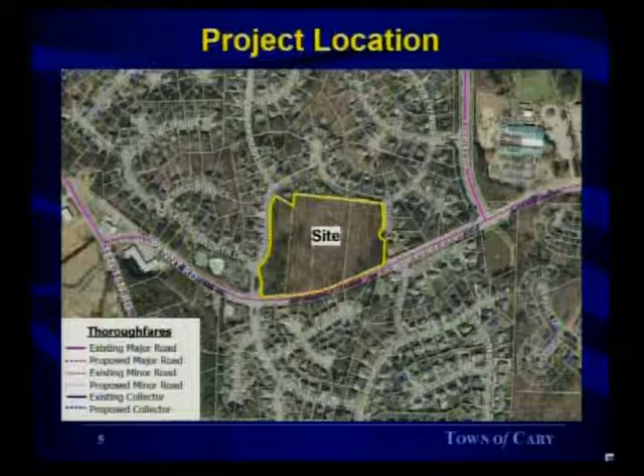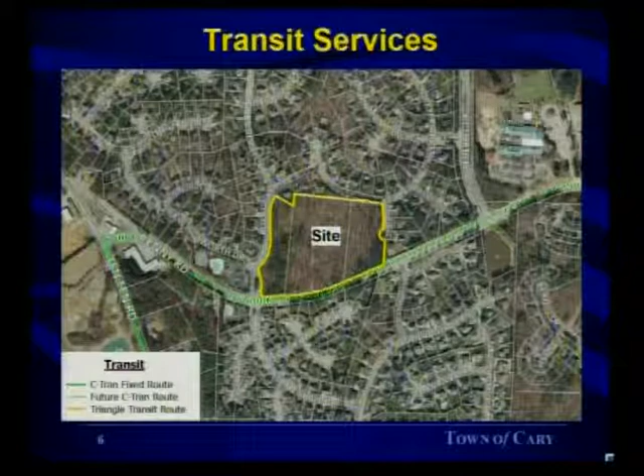The site is located along a future C-Tran route. There are currently no plans in the town's capital improvement budget to extend the route along this corridor in the near future.

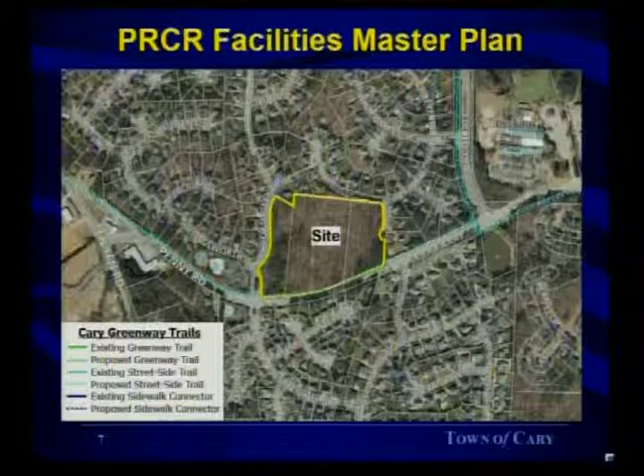The Parks, Recreation, and Cultural Resources Facilities Master Plan does indicate a 10-foot street side trail, formerly known as a multi-use trail, running along the northern side of Penny Road. This would extend westward toward the municipality boundary with Apex, and east toward another planned street side trail running along Ederlee Drive into the Regency recreational areas.

The site is impacted by a single stream buffer that runs north-south through the site, separating off approximately a third of the subject property to the east versus two-thirds to the west. This is drawn from our GIS maps, so it does over-exaggerate the length of that stream buffer. Field determinations, shown on the site plan, show that buffer being slightly shorter than it is here.

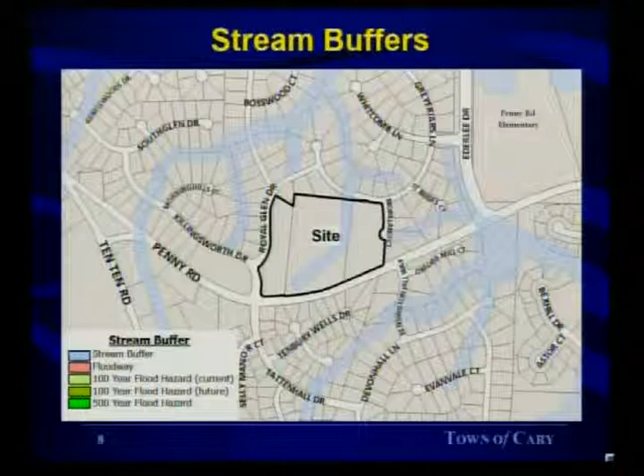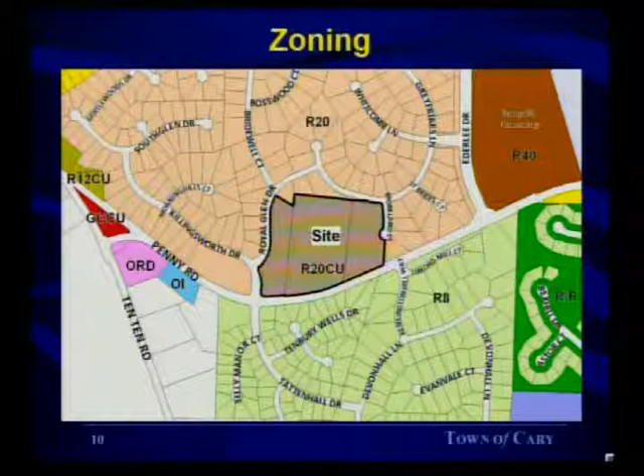The property was rezoned to Residential 20 Conditional Use late last year. The conditions on that conditional use zoning were related to density, restricting the number of lots in the subdivision to no more than 20, and dealing with dimensional standards, restricting the minimum lot width at 100 feet and the minimum roadway setback to 35 feet.

The subject property is currently developed with a single residential dwelling that's proposed to remain in place during development. They're carving out a new lot around the existing house. The remainder of the property is wooded with predominantly a hardwood canopy, with some small pines along the edges where it's been disturbed.

As mentioned earlier, the applicant is proposing development of a residential subdivision consisting of 20 lots, which is what was set by the conditional use rezoning. Almost half of those lots, 9 to be precise, would be accessed via existing roads in the surrounding subdivisions—Royal Glen Drive along the western edge, Greyfriars Lane to the north, and Moreland Court to the east. The remaining 11 lots would be accessed via a new cul-de-sac being proposed by the applicant.

Stormwater treatment for the site is being accommodated through the use of 2 bioretention areas: one at the northern end of the site, the dark blue area at the end of the cul-de-sac, and the other at the southern end of the stream buffer, adjacent to the streetscape.

The applicant is providing the 50-foot Type A streetscape required along a thoroughfare for residential development along Penny Road. Because this development consists of residential detached dwellings on lots over 8,000 square feet, just as the surrounding development, there are no actual perimeter buffers required. However, at the time of development, there is a 20-foot Type B landscape area that will be planted and required to meet the Type B standard at CO, but there's no long-term protection there.

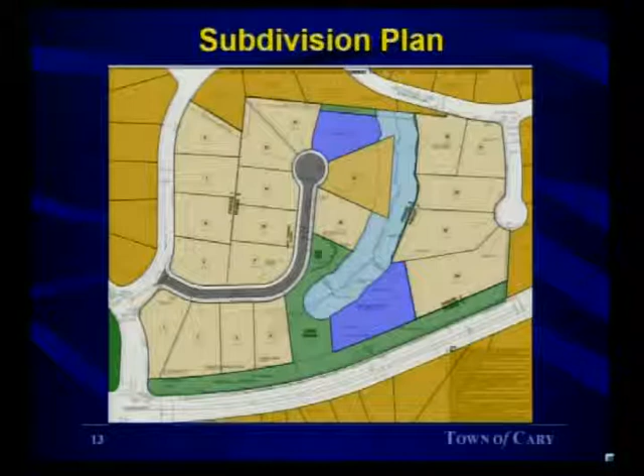The applicant's subdivision plan does include several minor modifications to development standards of the town. The first is a modification to the connectivity index. Items 2, 3, and 4 relate to improvements along the Penny Road frontage, and the 5th item is removal and replacement of 2 champion trees on the site.

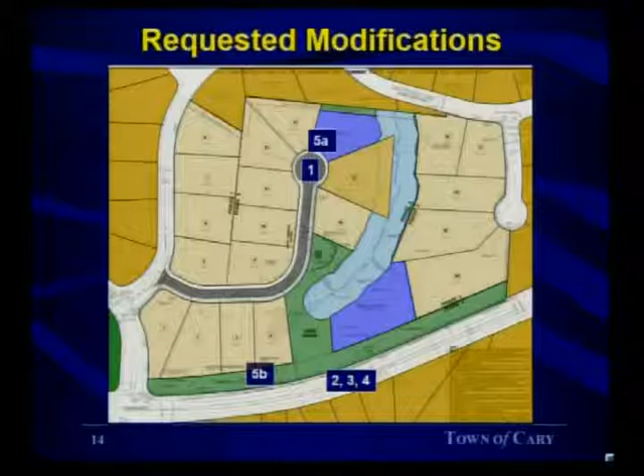The connectivity index established by the Land Development Ordinance is a ratio between street segments and street nodes or intersections. The LDO requires that ratio to be 1.2 or higher. The proposed subdivision consists of a single street segment, being the length of the cul-de-sac, and 2 nodes—the intersection with Royal Glen Drive and the cul-de-sac bulb itself—resulting in a connectivity index of 0.5, which is obviously below the 1.2 required by the ordinance.

The LDO also requires that for subdivisions where the connectivity index has been modified, the applicant must provide additional pedestrian connections linking cul-de-sacs—a 6-foot paved trail, as it states. The LDO further specifies that this pedestrian route does not need to meet accessibility requirements.

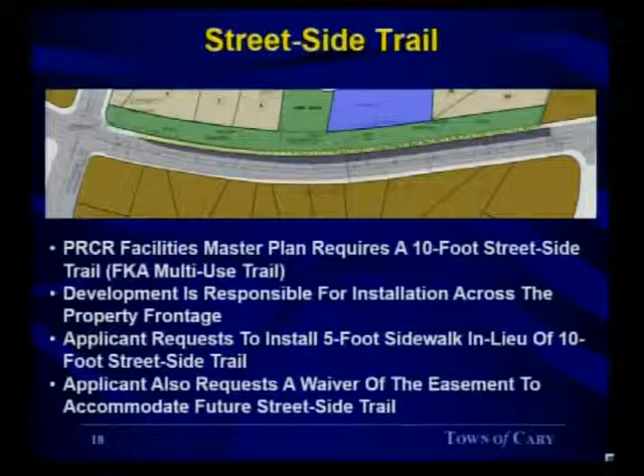The fifth and final modification being requested by the applicant is removal and replacement of 2 champion trees on the site. The applicant did a tree survey as part of their submittal and identified 10 trees in excess of 32 inches, which is the new definition of champion tree recently adopted by Town Council. Of those 10 trees, the applicant is proposing to remove 2, identified as tree 2, located at the northern end of the cul-de-sac, and tree 9, located adjacent to the right-of-way along Penny Road.

That concludes staff's presentation or introduction to the project. We will have additional analysis available for council to consider following the applicant's testimony and the speaker's testimony.

Thank you. This time I'll call on the applicant's attorney to present arguments and evidence in support of the application by addressing the applicable approval criteria.

Thank you, Kevin. Good evening, Mr. Mayor, members of the council. Jason Barron with Morningstar Law Group here on behalf of the applicant. Here with me tonight is Mr. Kurt Berger with K. Hovnanian Homes, Robbie Bell, an engineer with Bass, Nixon & Kennedy, who will be providing testimony related to the plans you all have seen, and finally Jeff Hochanadel, a transportation engineer with SEPI Engineering, who will be providing information with respect to traffic impacts anticipated to be generated by this development.

I'm excited to present this case to you all, quite frankly. Oftentimes I'm in front of you all with cases that are challenging, where we're trying to fit a piece into a puzzle that might not make sense for everybody involved, and I think this is a case that makes sense. These are minimum 20,000 square foot lots. Some of those lots shown on the plan, as you go to the bottom right-hand portion—let's see if I can get him to wake up—some of these lots are in excess of 40,000 square feet. This is a plan that makes a lot of sense. It is being developed consistent with the adjacent areas. It is providing sidewalk connections to the existing infrastructure. And while, as Kevin pointed out, it's not a part of the previously approved development, it's essentially fitting in that fashion. I've got Kevin—I don't know how quickly we can get to the exhibit that's not the clearest exhibit in the world.

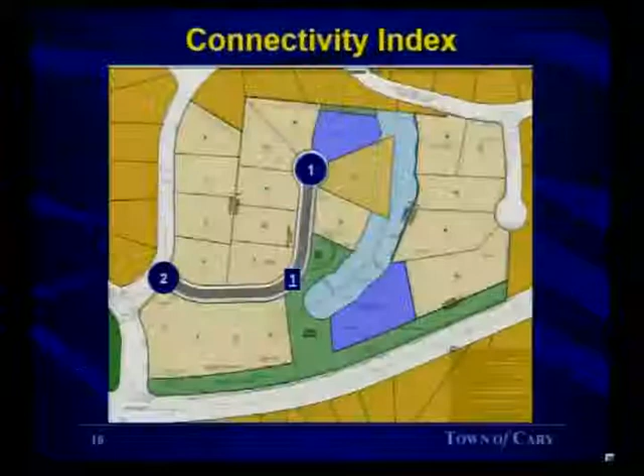What we are proposing is a road width entirely consistent with what's already on the ground, and a sidewalk connection entirely consistent with what's on the ground. It will feel incredibly seamless when you look down—it won't appear that a modification was made to development standards that otherwise should have applied. When you drive past the site, it will be just like everything around it. So the primary justification for those modifications is that we're trying to be consistent with the environment we're developing in.

So with that, I think the testimony you'll hear tonight from our experts is that the minor modifications are justified, and that the evidence supports a finding that we meet the requirements for approval of a sketch plan. At this time, I will call my first witness, Mr. Kurt Berger, on behalf of K. Hovnanian Homes.

Good evening, Mr. Mayor, ladies and gentlemen of the council. My name is Kurt Berger. I'm the division president for K. Hovnanian Homes of North Carolina, the applicant. I've spent 29 years in the home building industry, the last 10 of which have been in the division president capacity here in the Raleigh, Cary, Chapel Hill, Durham area. During those 29 years, I've overseen the development of more than 200 subdivisions, yielding approximately 20,000 lots. I'm excited to be here tonight as well.

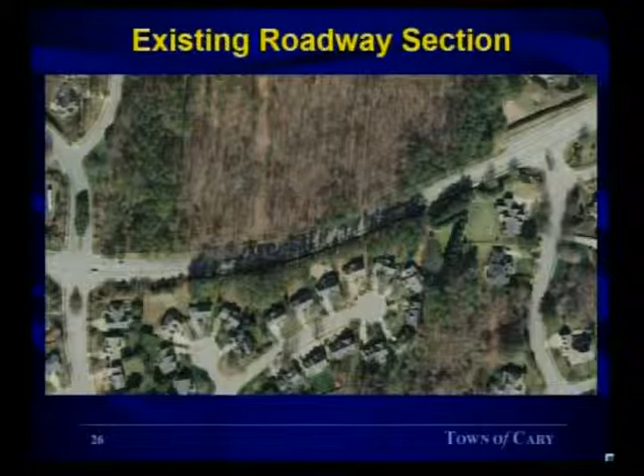I want to give you a couple perspectives of some photos. This was looking west from the main entrance into the subdivision from Killingsworth Drive. It's basically a 60-foot back-to-back street section with curb and gutter on both sides. It does have curb and gutter and sidewalk, and it's basically marked for 4 travel lanes.

Looking from the property toward Ederlee Drive, the developments already built out previously in this area, again it's matching up to a 60-foot back-to-back street section with curb and gutter and sidewalk. Given the gap in the roadway, there's generally just stripe for 3 travel lanes, as it's currently right now.

I want to talk briefly about the right-of-way dedication. Our CTP requires a dedication of 100 feet that would facilitate a 4-lane median divided roadway with curb and gutter, sidewalk, landscape median, and wide outside travel lanes for bikes. The applicant proposes a non-standard right-of-way width of 79 feet, of which they would use easements to basically facilitate the construction and installation of any easements or other utilities that may be needed in the shoulder of the roadway.

Staff has several observations I'd like to point out. First, the substandard right-of-way width offered by the applicant is insufficient to support infrastructure like sidewalk, drainage, public utilities, and other private utilities that we generally put in our shoulder sections of roadway. The proposed width is also insufficient to support future development of the road to the ultimate CTP without the town or NCDOT having to purchase that additional area if we decide to do a future widening project in that area. The easements offered by the applicant may not provide the level of authority guaranteeing the town or NCDOT to dictate other private users and uses allowed in those easement areas.

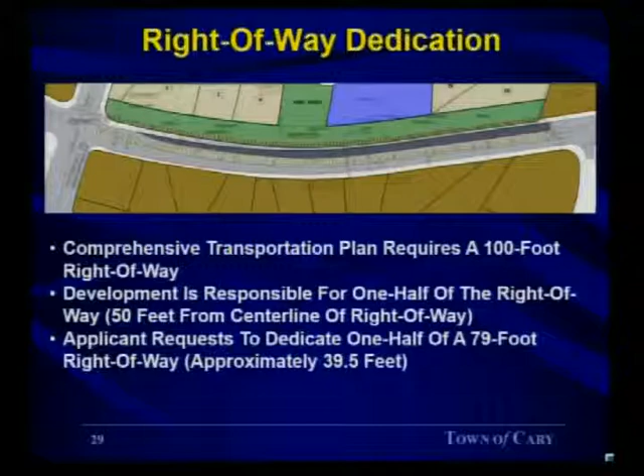I want to talk a little bit about the road widening improvements themselves. Our CTP requires a 4-lane median divided roadway, of which they would provide half along their roadway frontage, including curb and gutter, sidewalk, and median provision in the roadway. The ultimate width is a 78-foot back-to-back street section with an 18-foot landscape median, of which they would be required to do half.

The applicant proposes to match the roadway previously completed by earlier developments about 20 years ago, which is basically a 60-foot back-to-back street section with curb, gutter, and sidewalk already existing. The applicant also proposes not to construct the landscape median at this time, per our CTP.

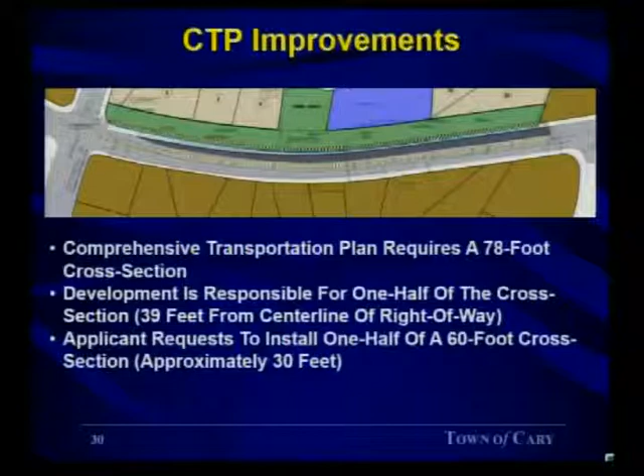Staff has a couple observations about this plan. The widening proposed by the applicant is not consistent with our CTP. Secondly, the landscape median does have aesthetic value per our town policies and guidelines, but limited value in managing access along this corridor since there are no existing driveways or intersections that would provide access management. So it provides no real traffic management benefit.

Staff has some opinions or things you may want to consider tonight going forward. You do have several options. I'll outline 4 options for you, which you may wish to consider regarding the road widening.

The first is to accept the widening proposal by the applicant to build a 60-foot back-to-back street section along their frontage. Second, accept the widening proposal but require a payment in lieu for the unbuilt section of what CTP would have required. Third, require the applicant to build to CTP with the landscape median. And fourth, require the applicant to build to the CTP width without a landscape median, and perhaps accept a payment in lieu for the median section of the roadway.

That's all I have to offer tonight.

I'm going to turn it over to Sandy Bailey from our Facilities Planning Group, who's going to talk a little bit about our street side trail.

Good evening, Mayor and council members. The street side trails are part of the town's overall greenway network. They're typically 10-foot wide paved trails that run along roads and connect other off-road greenways. They're used by pedestrians and cyclists, as are your typical greenways.

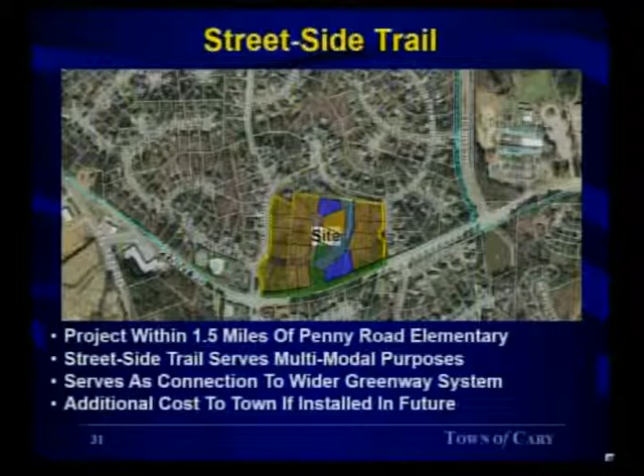And finally, just to close the loop with the request to remove 2 champion trees from the site. Of the 10 champion trees identified in excess of 32 inches across the site, they're proposing to remove 2. The applicant did a pretty good job of outlining their reasoning, and staff does concur with those reasons.

Tree 2 is located at the end of the proposed cul-de-sac, and there's not a lot of room to move that cul-de-sac bulb either east or west and still make it work functionally. The grade falls off the northern end of the site toward the stream buffer, and the BMP is located at that lowest point of the northern section. So in order to catch the water draining from that drainage basin, the BMP is where it needs to be topographically.

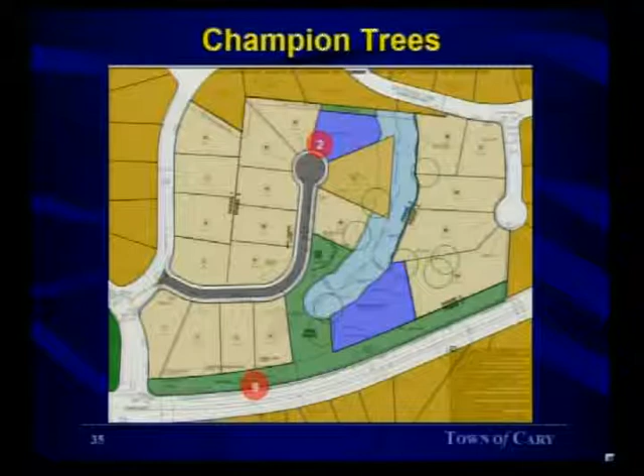So just to summarize quickly, and I'll put this back up once council gets to its motion phase of the hearing, they have requested 5 modifications. The first being connectivity index. The LDO requires a connectivity index of 1.2 or better. The applicant has requested an index of 0.5, and staff does observe that is probably reasonable based on surrounding development patterns and the fact that it's surrounded on 3 sides by existing subdivision roads and a thoroughfare to the south.

Right-of-way dedication: they are requesting 39.5 feet from the center line, which is half of a 79-foot right-of-way, tying into the right-of-way on the western side of the property. The LDO requires them to dedicate 50 feet, which is half of a 100-foot right-of-way. As Mr. Jensen testified, it's insufficient to contain the sidewalk they're proposing, as well as any other quasi-governmental utilities that may need to go in that strip.

At a minimum, staff believes that a 5-foot utility strip, the sidewalk, and a 1-foot shoulder beyond the sidewalk should be in the right-of-way if council is inclined to grant a reduction. The third request is a waiver to road improvements along Penny Road. The LDO requires a 78-foot cross-section. The applicant is proposing 60, the difference being roughly 18 feet, or the width of the landscape median. As Mr. Jensen testified, that additional cross-section width is for the landscape median, which has limited transportation value but does have an aesthetic value per the town's policies.

The next request would be the street side trail. The LDO requires them to provide a 10-foot street side trail and easement. The applicant is requesting to provide a 5-foot sidewalk in lieu of that, and no easement for future installation of a trail. As Ms. Bailey testified, that street side trail does serve an important multimodal purpose for getting pedestrians and cyclists to nearby recreational and educational facilities.

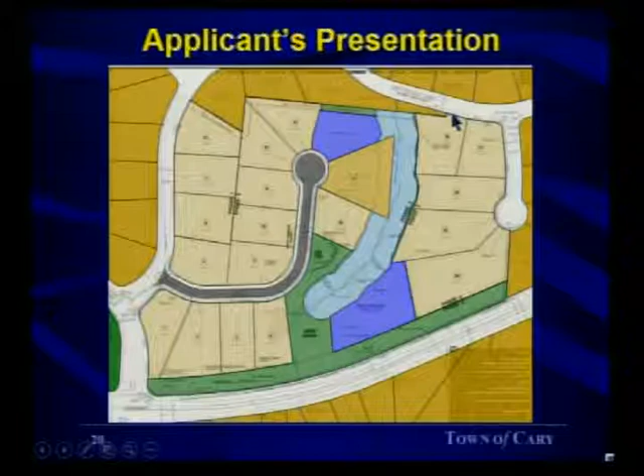I thought you showed a slide with some sort of connection from the center of that cul-de-sac out to Greyfriars. That was staff's analysis, simply indicating that the LDO requires an additional pedestrian connection to be made. Right, of the 2 points that would be possible, the one that makes the most sense functionality, whether or not its constructability makes the most sense, would be from the end of the cul-de-sac out to Greyfriars. So is that a proposal by staff? Okay, it was just a staff suggestion.

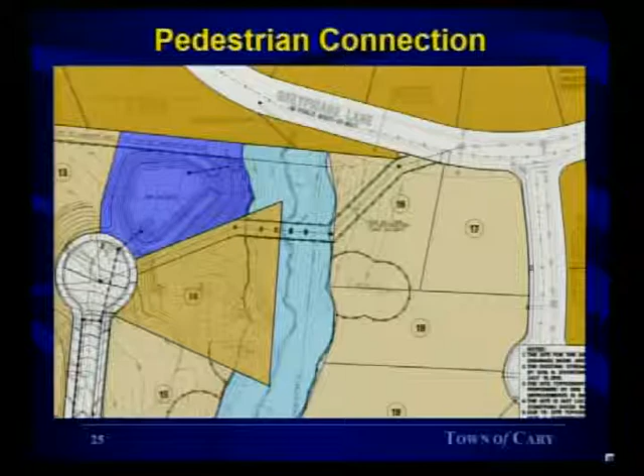There's a sanitary sewer easement that runs generally along that corridor. It's outlined here in the dashed green line. There may be opportunity for portions of that trail to coexist with that easement to limit additional disturbance. As long as it's not a structure, it could be located in the easement. Okay, thank you. Based on the topography, you said that's not going to be handicap accessible. It would not be accessible. 20 feet difference.

Mr. Mayor, I apologize for interrupting. The hearing has reached the 1 hour time limit. Thank you, proceed. Okay, thank you. No, those are my questions. Thank you.

So I guess my one real question I'm still not clear on is, the applicant says we have the ability to give the town whatever they need regarding the easements and such, but there seems to be, we're getting right-of-way, we're getting easements. I mean, what prohibits the applicant's proposal from allowing the town to have the necessary infrastructure or access to it, given that it's in harmony with everything else up and down the street?

That's what I'm kind of not clear on. I believe they could. The easement document they would have to probably secure with the town would give the town the first rights to refuse anything else in that easement. Without that sort of latitude, there could be other users within that easement, which could include private utilities, gas, electric, telecom, that may prevent us from maintaining those facilities without encumbering maybe some of those private utilities. So I think it could work.

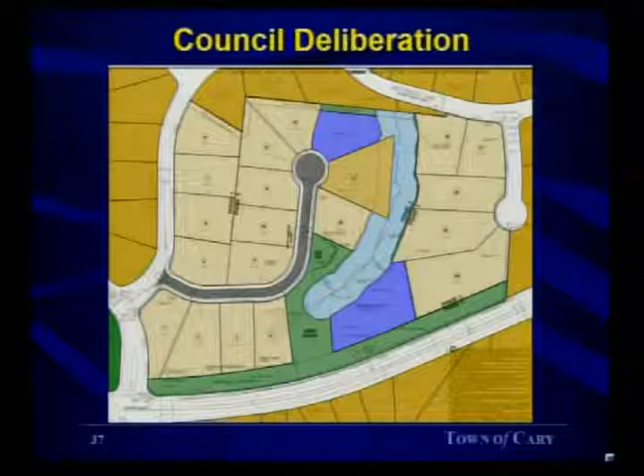Okay. And I will add, if I may, due to council's recent adoption of the revised champion tree ordinance, if the concern is the loss of the BMP, it is a bioretention area. It could be located now in the streetscape if they're showing that they're saving other significant trees. And lots 19 and 20 do have 3 or 4 champion trees on them, and they've actually redesigned the site to save an additional one of those, which they were originally proposing to remove.

But that may be another option, is if council chooses to have them dedicate the entire right-of-way, looking at relocating or keeping that BMP in the street. So they could dedicate the entire right-of-way, but we could allow the BMP to encroach into the buffer? Correct, because it is a bioretention area, which is what's currently proposed, it would be allowed to stay in the streetscape.

That was the one thing I hated about that ordinance.

There's a challenge. Other questions? But...

I mean, I think it's a wonderful plan. I really do. I don't know that we've gotten something that's so harmonious with adjacent neighborhoods in a long time. Lot sizes are phenomenal. When's the last time we saw a 40,000 square foot lot? It's phenomenal. I think this would do nothing but help the existing community and be a benefit to it.

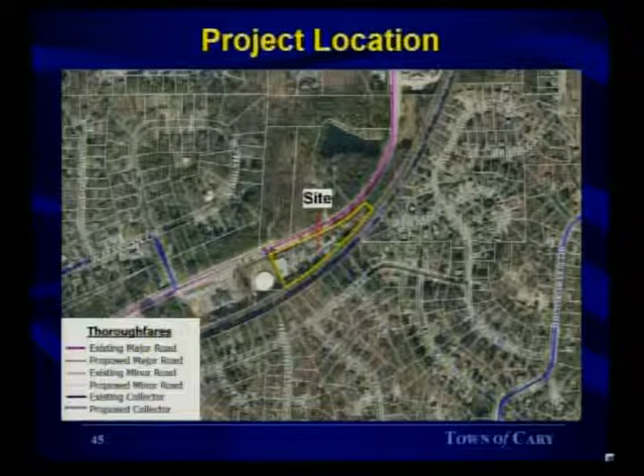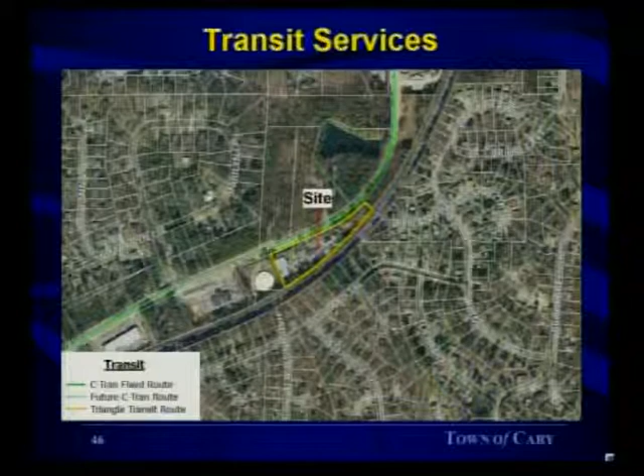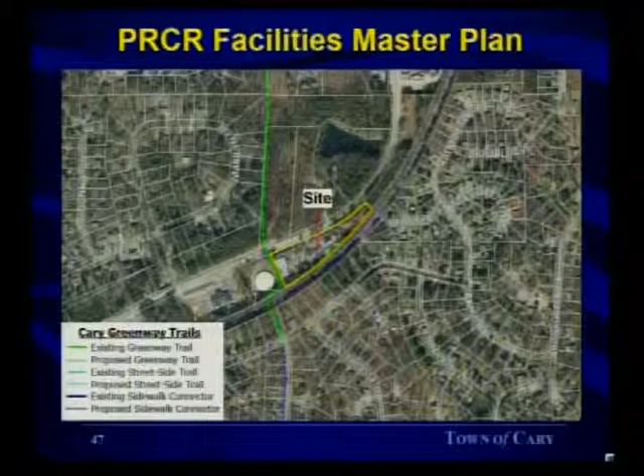The Parks, Recreation, and Cultural Resources Facilities Master Plan does show a proposed greenway that runs off this property, but adjacent to it, so I thought it was germane to discuss briefly. On the Town of Cary's water tank site, it crosses Old Apex Road and then runs north-south into the communities on either side.

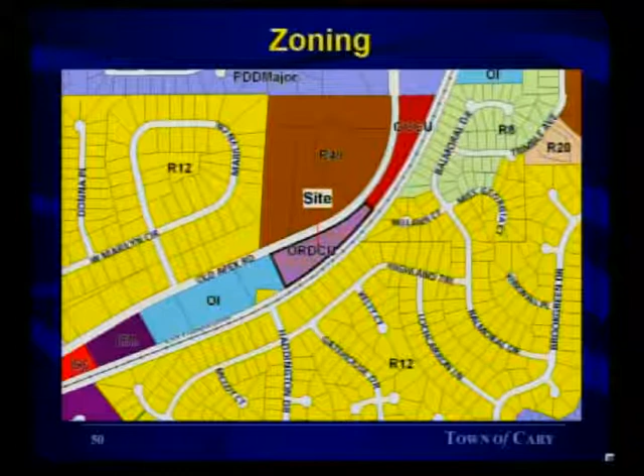The property is currently zoned Office Research and Development, conditional use since 1996, I believe. The conditions on the property restrict the use to a wholesale/retail garden center and require a 30-foot undisturbed streetscape or buffer, as it was termed back in the 90s, along Old Apex Road.

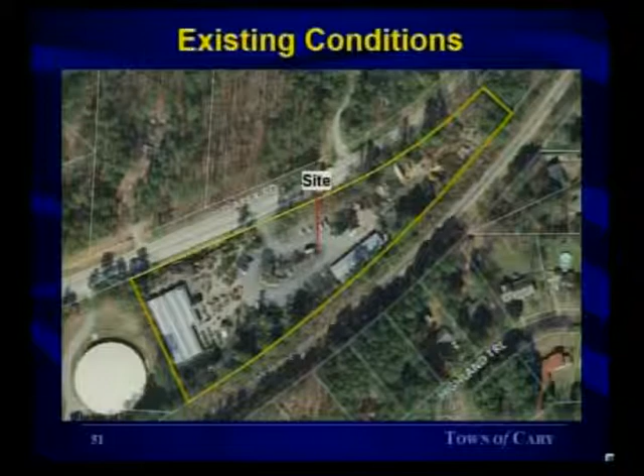The subject property is already developed as a garden center, as Mr. France already alluded to. The building is located at the far western end of the site, parking located in the middle, and as you go toward the northeast, it's used for a lot of bulk storage, equipment, and other non-customer related uses.

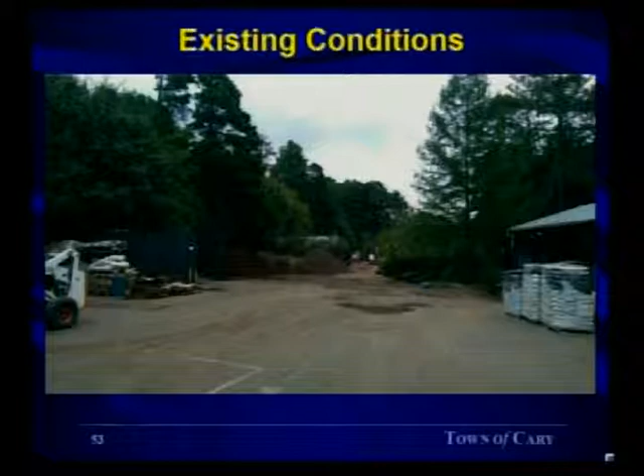So basically, they've requested to reorganize the eastern end of the site to provide some additional parking for customers. It requires the addition of some additional landscape islands to meet current landscape requirements.

One of the downfalls of the existing site, if anybody's been there, is that there is some existing parking occurring out on Old Apex Road. While there is sidewalk along the Old Apex Road frontage, it only extends to a point approximately halfway along the frontage.

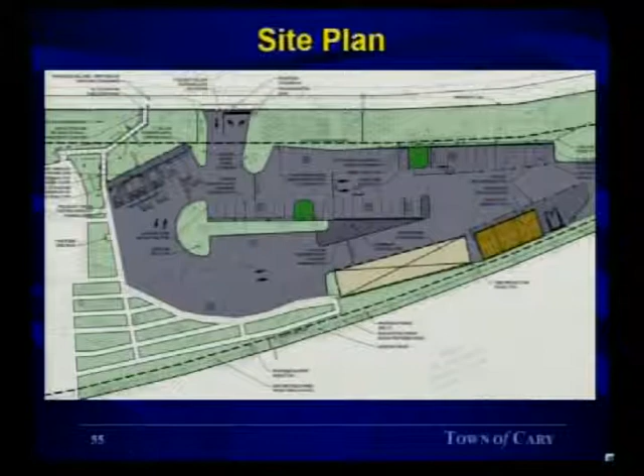This site does also include a pair of modifications to the town's development ordinances, which is why it is before council tonight. Both require council action. The first is a reduction to the 20-foot type C buffer along the southern property line, and the second is another modification to required right-of-way dedication.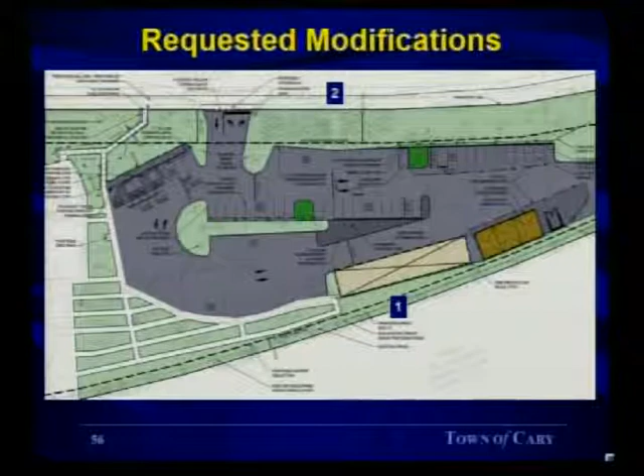So the applicant is requesting to reduce the 20-foot type C buffer, which is an aesthetic buffer required by the LDO, along the southern property line between this use and the adjacent right-of-way for the railroad tracks, from 20 feet to 10 feet.

And the second modification they're requesting is a right-of-way reduction. The CTP requires a 91-foot right-of-way, so they will be responsible for their half, which would be 45.5 feet. However, when this property was developed in the mid-90s, Old Apex Road was widened to its current condition, which is half of a 90-foot right-of-way. That was dedicated, so 45 feet, resulting in approximately 6 inches of additional right-of-way that would be required. The applicant is requesting that town council waive that additional 6 inches of right-of-way dedication.

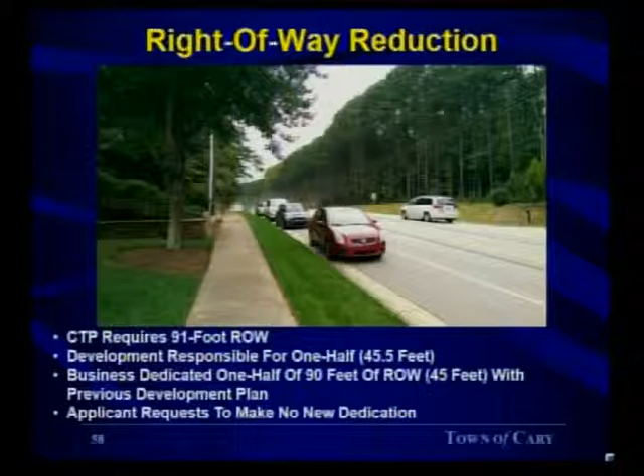That's a tough one. That concludes staff's introduction, and we will have additional analysis following the applicant's presentation and any other speakers that present. Thank you.

Okay, very good. We'll call on the applicant's attorney to present arguments and evidence in support of the application by addressing applicable approval criteria. Thank you, Kevin.

My name is Isabel Maddox, and I appreciate the opportunity to be here tonight. I'm representing Keith Ramsey and K&D Ramsey LLC, the owner of the property, operator of the Garden Supply Company. Also here with me tonight are my development team, Richard Brown, landscape architect, Mike Horn, PE, and Bethany Ray, all of Kimley Horn. Did you need my address too, for the record?

Ours is a fairly simple request. There are 2 modifications that we need. One is to permit the reduction of the buffer along the railroad tracks. We, a garden center with lots of plants, have to buffer the railroad tracks, so we want to reduce that from a 20-foot type C buffer to a 10-foot semi-opaque buffer, which is a more heavily landscaped buffer. The second is to waive the requirement for those 6 inches of right-of-way. We did what was required a number of years ago. The CTP has increased it to 91 feet, so we have to do our half of that, which was these 6 inches. And finally, the request is to approve the site plan. So those are our 3 requests tonight. And first, I would like to call as my first witness Keith Ramsey, the owner of this property.

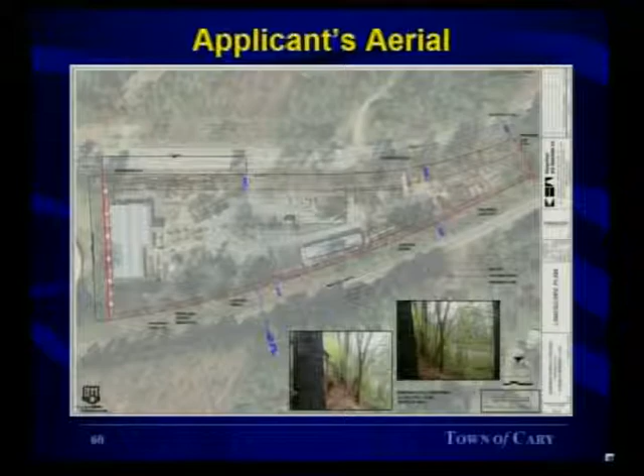It should be noted that the development plan for the property, SP-037, also included this buffer on the western half of the site, and the requested reduction along the rail right-of-way is consistent with those prior approvals.

If I can, we would like to request to enter Exhibits A and B, A being the aerial that we have up on the screen, as well as Exhibit B, which is the landscape plan that better defines the buffer standard that we're proposing to enhance.

Rich, would you say that the shape of the property creates a hardship for this property owner? It does. And would the proposed landscape requirement standard be increased with the smaller, narrower buffer? Yes, it would. So that would result in heavier landscaping. That's correct.

So relative to Exhibit B, which is up here on the screen now, I wanted to point out two quick things. As staff indicated, we have an existing 10-foot buffer that is required to meet a Type C aesthetic buffer, and it includes a fence, a solid fence along the property line up to this point, with existing mature vegetation shown here.

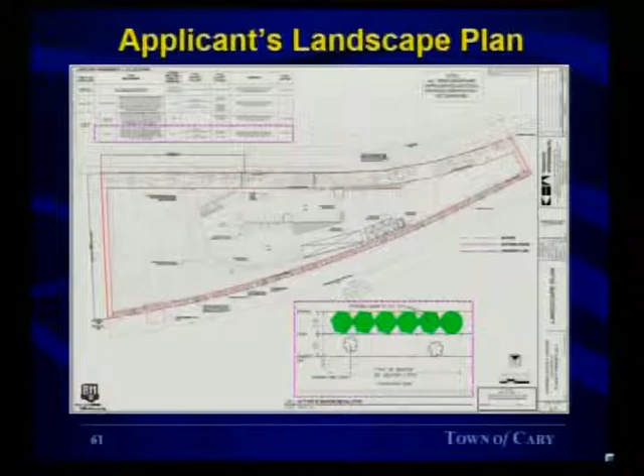Ms. Maddox, I believe the last thing, there were 18 comments still in process currently with staff with this development, and we wanted to make sure we provided those.

Yes, as well, and as to that point, in your package I'm sure you saw a comment about the overall site plan, that there were still 18 comments outstanding. In fact, those have all been responded to effectively. The only comments that were not resolved relate to this buffer we're requesting a modification on, and the right-of-way dedication. There was a point about parking that has been resolved with staff - they calculated parking in a different way, so that is not an issue anymore, and Mr. Hales can confirm that. That's what those comment sheets that Richard just handed out.

Next, I would like to call Mike Horn to speak with you just briefly about the transportation aspects of this plan.

Good evening, Mayor, members of the council. My name is Mike Horn. I'm with Kimley Horn and Associates, 3001 Weston Parkway, here in Cary, 27513. I am a registered engineer in the state of North Carolina, having now practiced traffic engineering for over 30 years.

I'll address the last three findings that you have, and I'll go quickly. Number 4: does the plan provide safe conditions for pedestrians or motorists and prevent a dangerous arrangement of pedestrian and vehicular ways? I have visited the site and reviewed the site driveway of the Garden Supply Company on Old Apex Road. Old Apex Road is a 2-lane roadway with a middle turn lane to allow left turns from Old Apex Road into the site. Based upon my review of the traffic operations of this intersection, it is operating safely today. With the addition of on-site parking and the new pedestrian connection, this intersection will continue to operate safely.

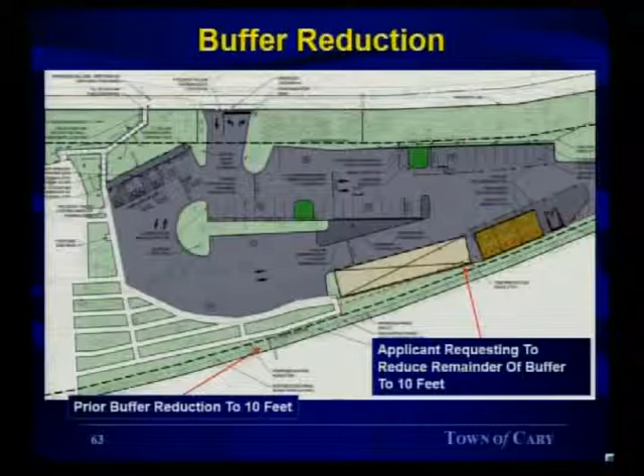Staff's analysis is it's consistent with the 10-foot reduction, which was approved along the southwest portion of the property adjacent to the existing display area. The existing storage shed is located approximately 15.5 to 16 feet away from the property line, so that would be encroaching regardless. And the reality is the majority of that, or at least half of that additional 10 feet, which would require clearing under today's ordinance, has already been cleared and is being used for storage.

It's got gravel, asphalt, so there's very limited disturbance of existing vegetation. What exists there is small scrub pines and small understory saplings. There's no significant vegetation that would be disturbed by reducing that buffer. In addition, as the applicant has indicated, they are proposing to either keep or add fence. This plan, which is what we've been reviewing, shows a proposed 500 feet of fence headed toward the north-northeast. They're saying it's existing, but either way, there'll be a privacy fence in that buffer and additional shrubs, which will raise it from a type C aesthetic, intermittent visual screening, to a semi-opaque standard, to a height of at least 6 feet.

So while we're reducing the width, we're getting a higher performance standard in regards to screening the railroad tracks. The right-of-way concern, as the applicant has indicated, the additional 6 inches of right-of-way is really not going to provide any benefit to the town. Any maintenance we need to do on the sidewalk is going to be performed from the street side of the sidewalk in any case. That's basically half of the 1-foot shoulder we typically have outside the sidewalk. As the applicant mentioned, there is existing hardscape that has been installed by the applicant over the years.

That does abut the right-of-way or the property line. Here you can see a stone wall placed around that utility pole, which is located immediately adjacent to the sidewalk. NCDOT policy would say that wall needs to come out of the right-of-way today. There's really no, in staff's opinion, benefit to getting the additional 6 inches of right-of-way, and there's a definite aesthetic value to some of the hardscaping that's been placed in what would be right-of-way if it gets dedicated.